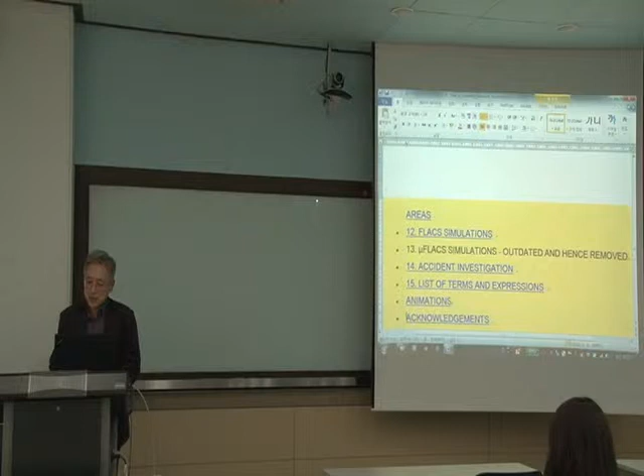Don't be disappointed for chapter 8, because it covers whole structural dynamics in a few pages.

What happened to Hyunchul? Who else is missing here? Kyung-suk is here. Is Hyunchul the only one? Oh, Bong-sik too. What happened? They didn't tell me.

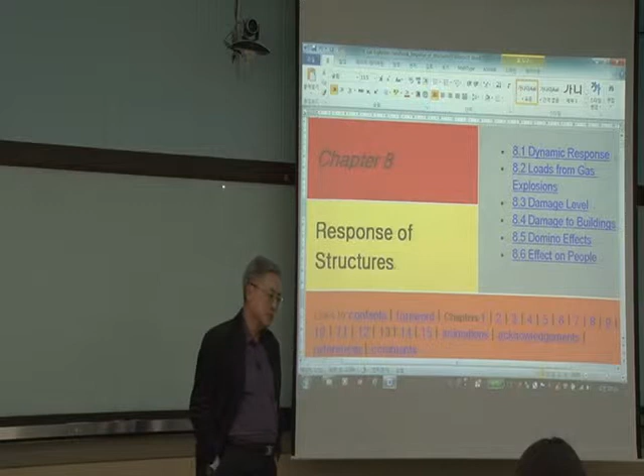Okay, response of structure. As I surveyed Monday, most of you took the course on vibration. Vibration is not identical to structural dynamics. The art of vibration is a subset of structural dynamics.

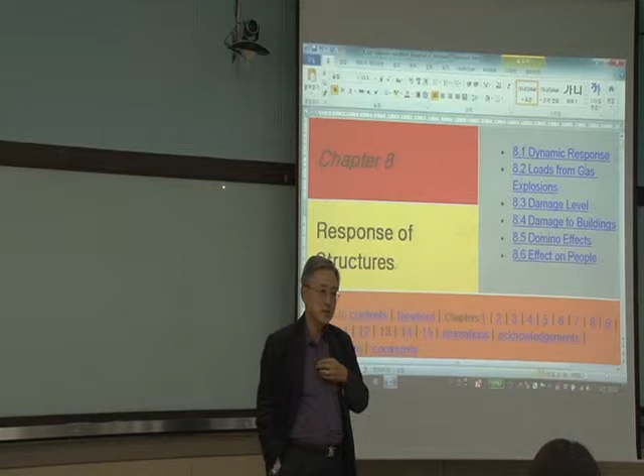But one time or another, even OSE has a variety of students majoring even in electrical engineering, chemical engineering, mechanical, aeronautical, all that. But when I teach at the Naval Postgraduate School, we have a psychology major undergraduate, education major undergraduate, pursuing the master's in mechanical engineering.

What do you think? It's very difficult. They have a tough time, but back then we had a program for 2.5 years. In that time they did very successfully, but they are taking four straight courses throughout the year, and in addition they have to write a thesis. So day and night they pursued it. It was very successful. I never saw anybody who failed.

One person, one officer who failed under my supervision couldn't get the minimum 3.0. He got 2.98. If you round off, it's a 3.0, that's good enough. But in the military, 2.98, you can't graduate. So out of over 110 students under my direction, he couldn't get the degree. That's what happened. That's their rule. That was a pretty sad moment.

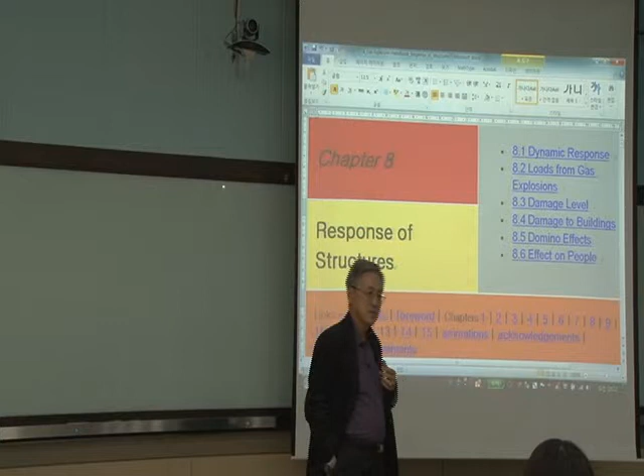But here we have a variety of students. If you didn't take the vibration class or structural dynamics class, I think you have to rethink taking that course, because without dynamics, just getting statics is not enough. Dynamics—you have to learn the basics to have a successful career.

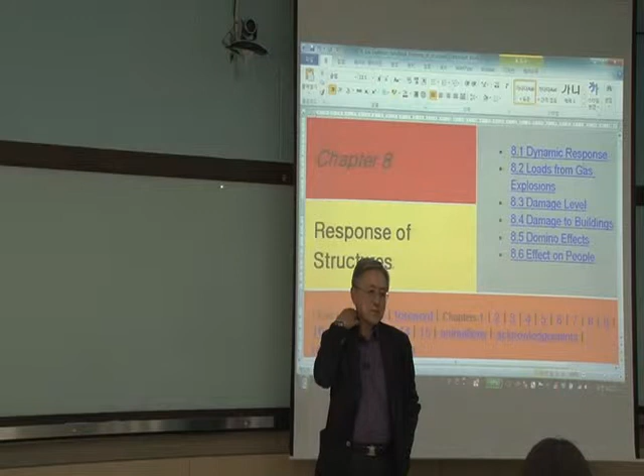So this is the response of structure. Section 1, dynamic response. So dynamic response and static response, what's the difference? All the ship designers, they use a skill called statics. In the past and the present, I really don't know the detail in Korea's shipbuilding business.

In the US, everything was based on static analysis. No dynamic analysis for designing the hull thickness—all the internal structure design, they use statics. And they use the so-called safety factor. Safety factor is really a static concept—it's part of the static analysis, which is a multiplier.

So the safety factor, the naval architect applies it to strengths. They divide the strengths, like yield strength or yield stress or ultimate stress, by the safety factor to reduce the strength or stress, which is not very good practice.

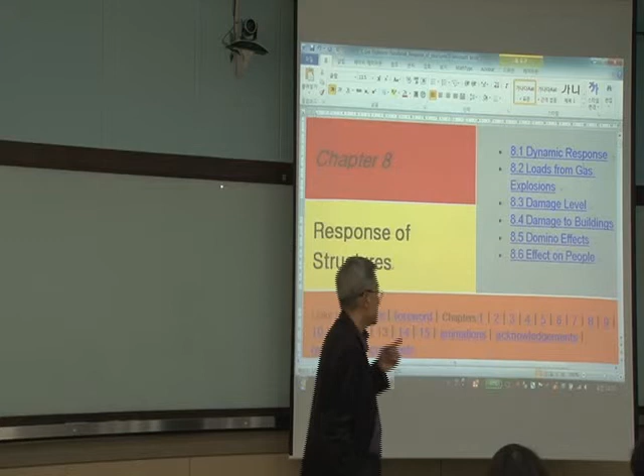It's introducing a very simple concept on structure dynamics, but you must know, and most of you know, I'm pretty sure 100%, what vibration is, what structure dynamics is. Before you graduate, I want to tell you to take at least one course. That's very important. So, dynamic response.

And section 2, load from gas explosion. Don't be disappointed as you read this section, not much there, because it depends on the type of fuel, everything changes. And configuration changes everything. It's not a simple gas explosion in the open environment.

Sometimes it's partially closed, fully closed. It happened in the tube, or vice versa. And the damage level, we'll talk a little bit about that.

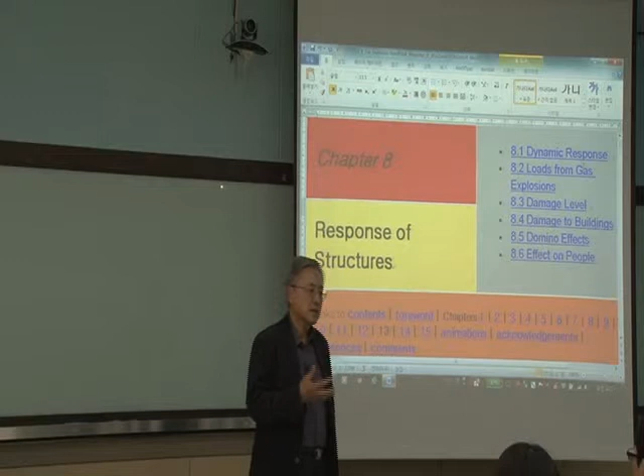Damage to the building and domino effect, which is really, I can say, close to progressive collapse. In the building, for example, if a deck collapses due to the explosion, then progressively, as a result of the collapsing deck, the next moment the wall could be collapsing. Then as a third part, the whole thing could collapse.

And if one critical structure member collapses, as a result, another part can be collapsed. As a result, other parts will be collapsed. It's called a domino effect, okay?

Progressive collapse. This is another, not really mechanical, general structure mechanics and simple mechanics. There is an art called progressive collapse.

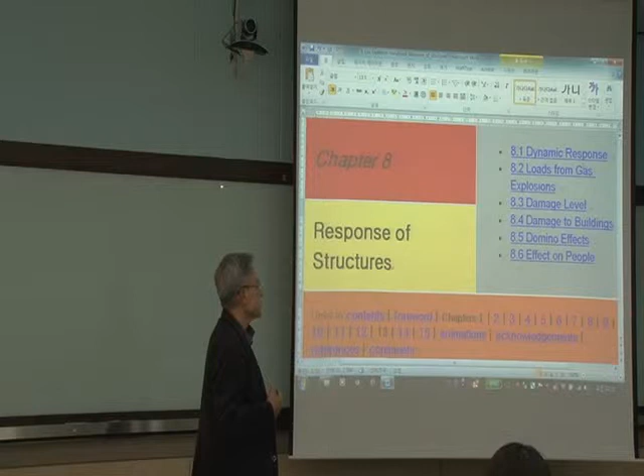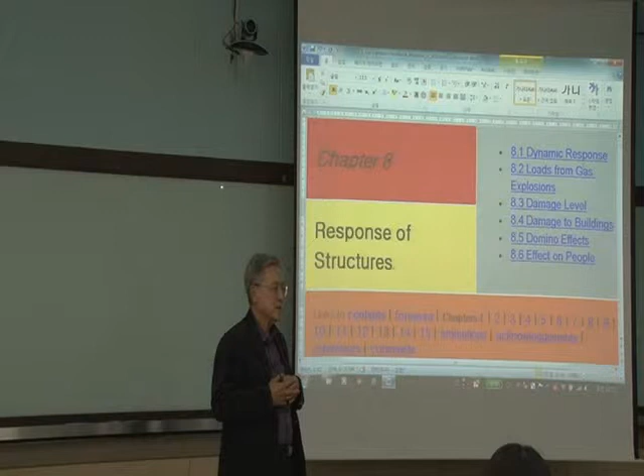Domino effect, people, and the effect on the people. For gas explosion, it gives a direct impact to the people. But you see the accident situation, the most recent accident is the Busan accident.

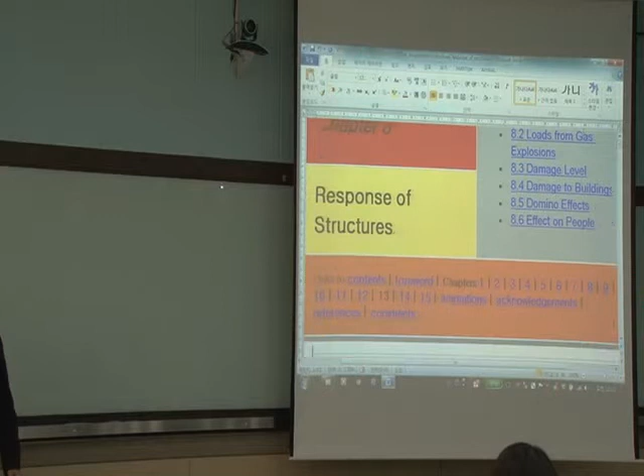Few people really died as a result of the accident, and there are a few different things you can remember, but this chapter tells some story, not much story. So to predict explosion pressure is one step in the consequence analysis.

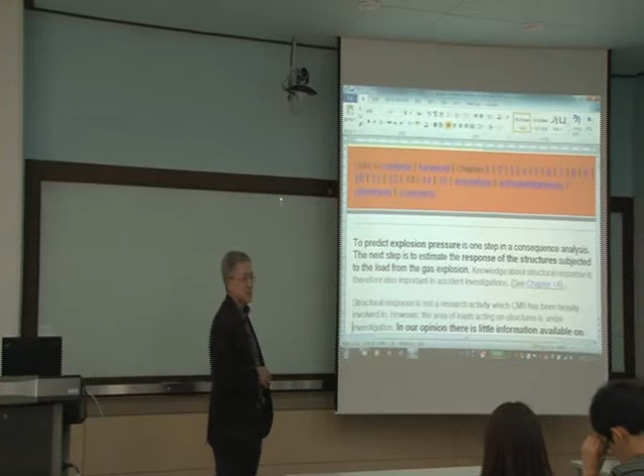The next step is to estimate the response of the structures subjected to the load from the gas explosion. It's very easy to say, but there is difficulty to define the loading.

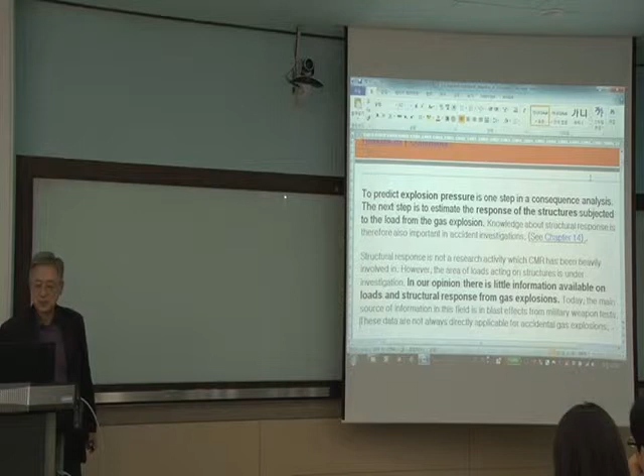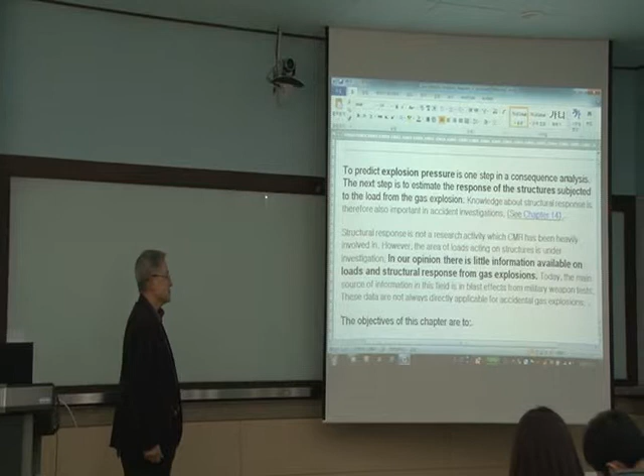So here, in our opinion, there is little information available on load and structure response as a result of gas explosion. But don't feel like, geez, what could I do. Since 1985, there are lots of publications available for all different types of fuel.

Then you can really explore the internet. You will get lots of information for the particular environment, for the particular loading. So it's not really disastrous.

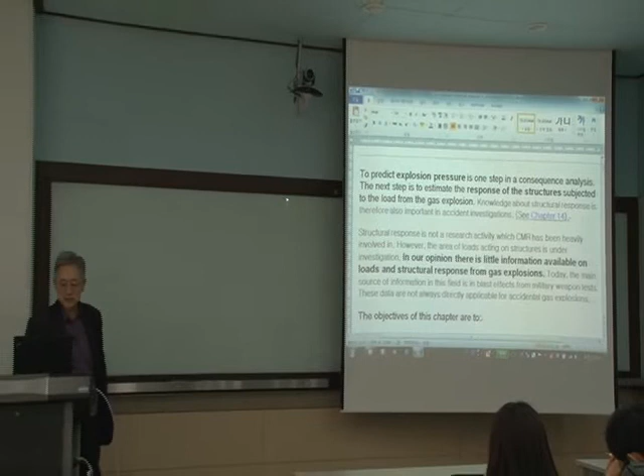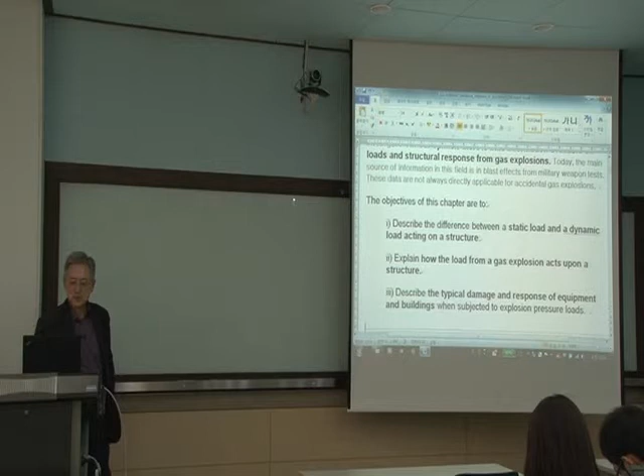Objective in this chapter is to describe the difference between static load and dynamic load acting on a structure, two basics. Explain how the load from the gas explosion acts upon a structure. Describe the typical damage and response of equipment and buildings when subjected to explosion pressure loading.

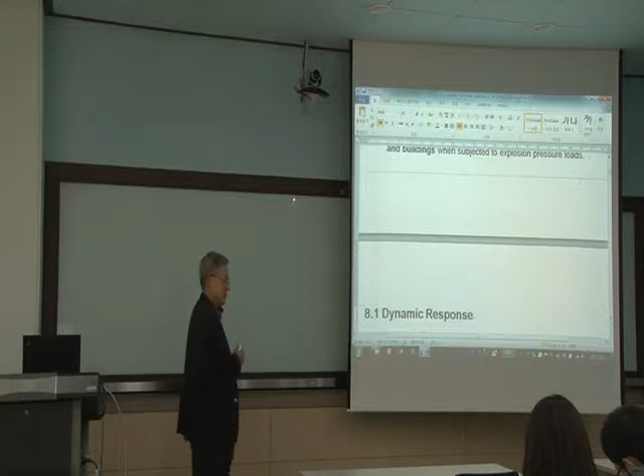Explosion pressure loading. For gas explosion, you are considering the flame effect also, the fire effect, temperature effect that you have to also consider. And section 8.1, dynamic response, is concerned.

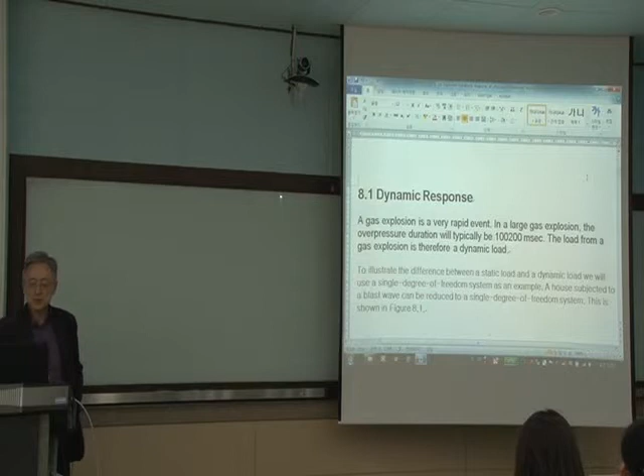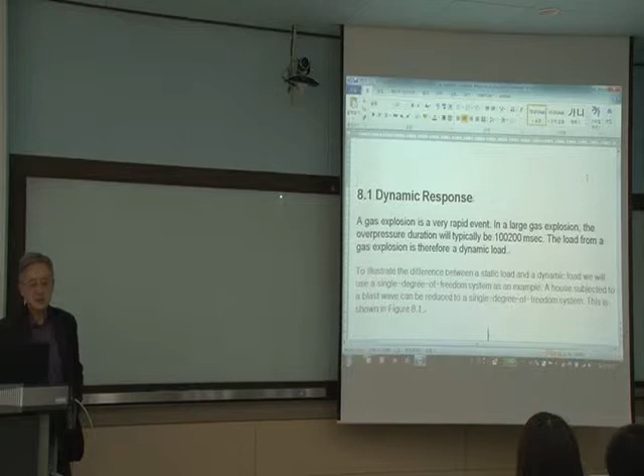The gas explosion is a very rapid event. In a large gas explosion, the overpressure duration typically is something like almost 2 minutes. Could be longer, depending if it combines with a fire. The duration could be longer than 2 minutes.

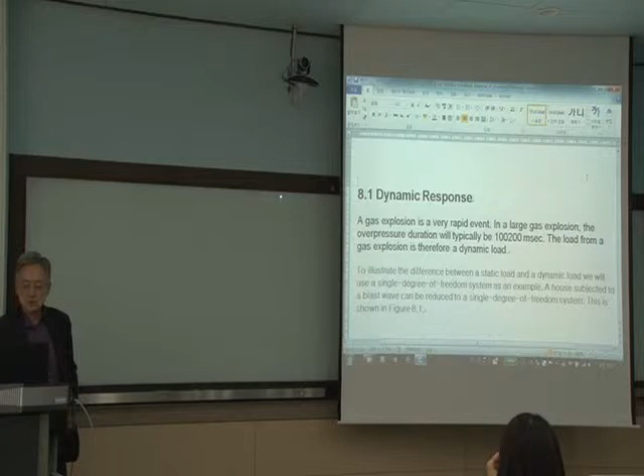So this is in milliseconds. You divide by 1,000, then you get the second. Then you divide again by 60, then you get the minutes, about almost 2 minutes. But duration really varies. Duration of the loading for gas explosion, don't think it's only milliseconds.

Chemical explosion, high explosive, is less than 3 or 4 milliseconds. Everything is all done, loading is done. But for gas explosion, no.

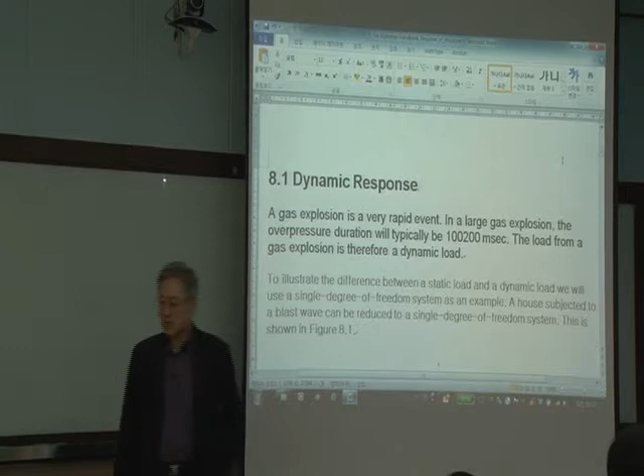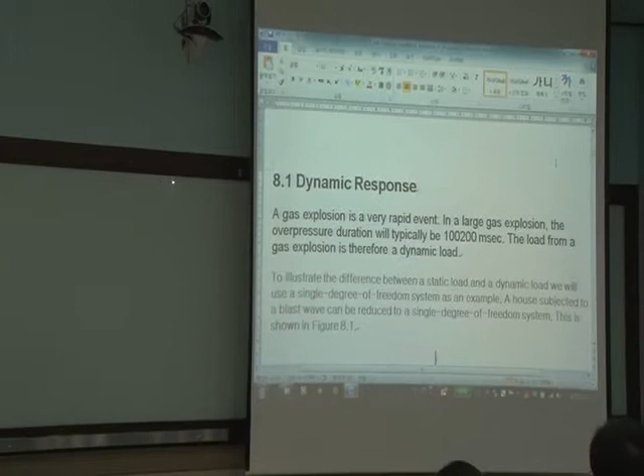If it's coupled with the flame, fire, it could go more than 2 minutes, could last 10 minutes. So that's what you have to think about. Gas explosion, this 2 minutes maybe for gas explosion. For explosion, maybe okay.

I was going to draw all that, but it's too basic. I'm not going to bother to do that. Just to capture the concept here again.

But whoever faces this for the first time, this is about the simplest you can think of. This is like a gable frame, the house or buildings, whatever. Then you can convert it into the simple mass spring model.

So mass and spring. Here, no damping is included because damping dissipates the energy. So if you put damping in the model, then the response slowly reduces in an exponential fashion. So this prototype converts into the model as a pressure here, shock pressure, and this is the mass of the building.

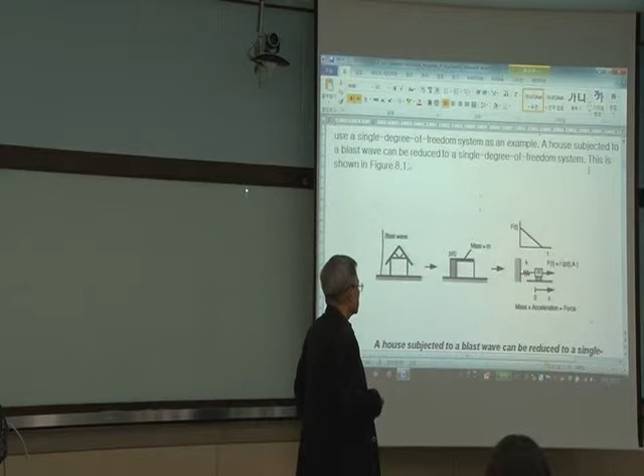So building times, what's this? Building mass is simply saying mass is m. This is pressure, which is loading. And this column you can replace as a spring. So mass spring model, and this P is pressure times exposed area, which is a force.

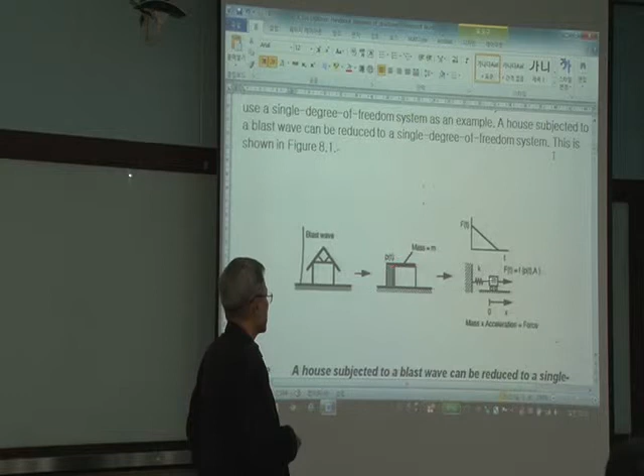It's a time domain force, so that's dynamic loading. Then if you write equations of motion for this simple model, this is like a fixed model. You could make it more complicated. If the base oscillates, like earthquake loading, sea wave loading, that's a time-dependent displacement you have to introduce.

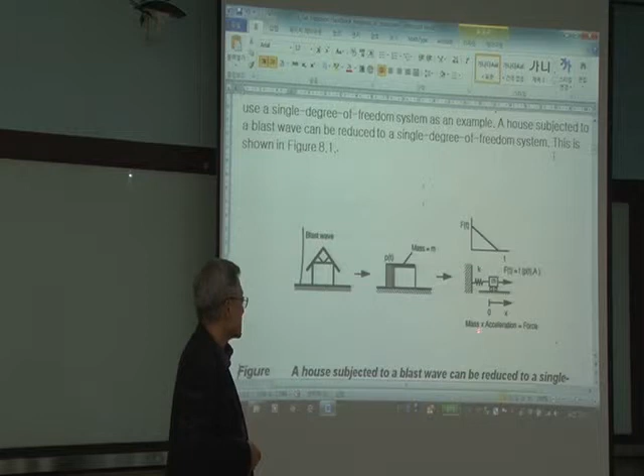So if you write the equations of motion for this model, what is it? Who took the vibration course? The basic equation is M x double dot plus K x equals F, right? F here is this triangular pulse, you can say shock loading. So M x double dot plus K x equals F, which is a time-varying loading, and that's what you have to solve.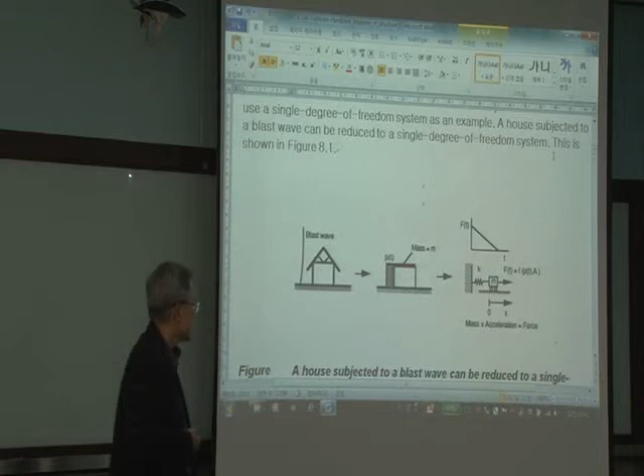If you consider the damper, which is a dashpot damper, then you usually use C. C's unit involves the velocity term, right? So C x dot is the damping force, which dissipates the energy. Here there is no damping in the system.

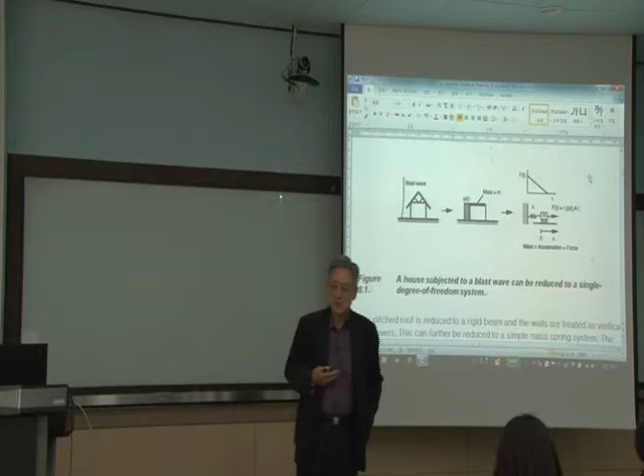So it reduces down to the single degree of freedom system. Usually you can handle all the multiple degrees of freedom, and you can use a finite element model or finite difference model, depending on the system you are dealing with, whether it's a fluid system, a structure system, or a combined system. You can introduce those models. In structure systems, as you know, the finite element method is most popular.

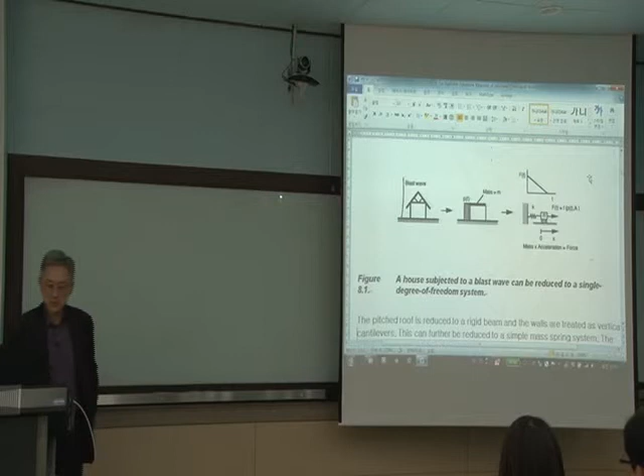And this is a result of the single degree of freedom system. Over here, this is displacement, which is x, the dynamic response divided by the static response. So this is like the static response, and this is the dynamic response with a different TL, okay.

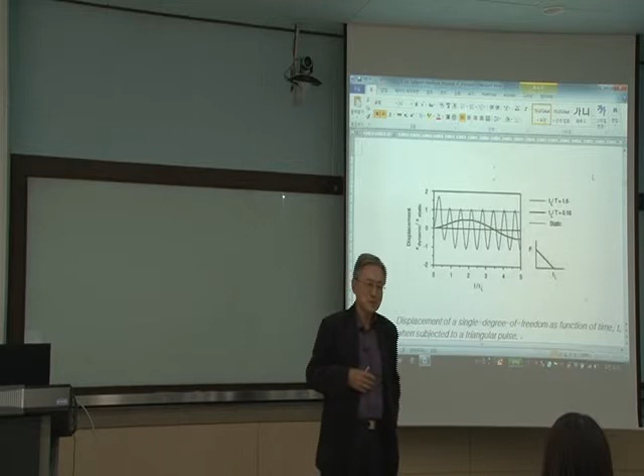Dealing with the ratio here, T is the duration, which is the fundamental period. T equals 1 over F, right? For a single degree of freedom system, you have only one period, which you can call T. T is 1 over F, 1 over the fundamental frequency, and 2 pi F equals omega.

This is all the first lecture of vibrations. Don't look at me like that. Which is all that stuff.

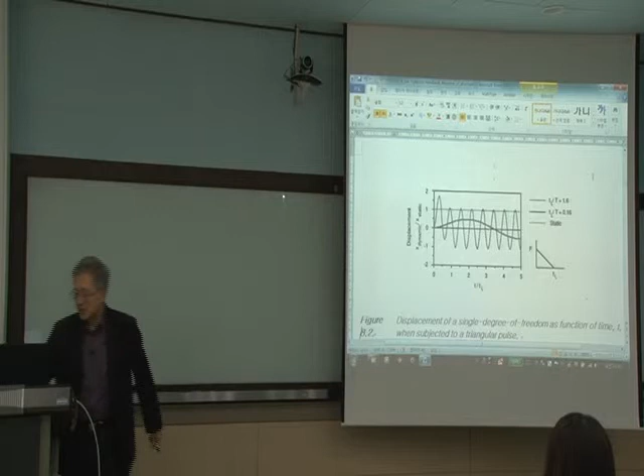So then it shows this is really fundamental. The period is very long here, and this fundamental period is a little bit higher. You can compute all that, but it's virtually solving the equations of motion for the single degree of freedom model. So this is the case.

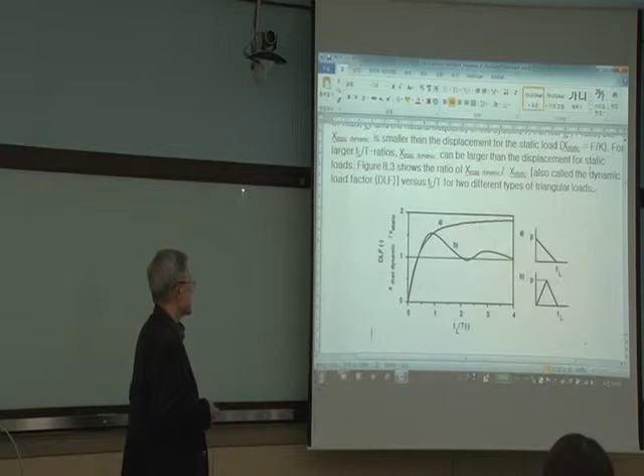DLF here, they use a slightly different naming. This is the DLF, as shown here, dynamic load factor or dynamic amplification factor. They use different names, but for dynamics the response amplifies, that's what it really shows here. For a triangular pulse of this type, this is A, the response goes like this. This is TL over T, the fundamental period.

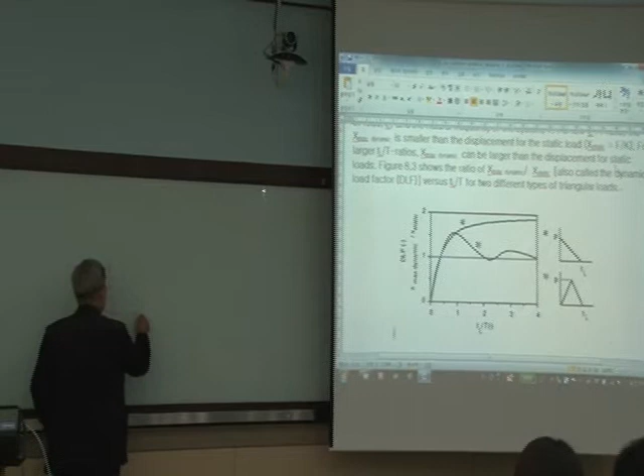So I don't want to skip even this: T, the basic equation for vibration frequency, right? Period, right? And 2 pi f equals omega, radians per second. This is all the beginning of vibrations. So here you can say f equals omega over 2 pi. So you can do whatever.

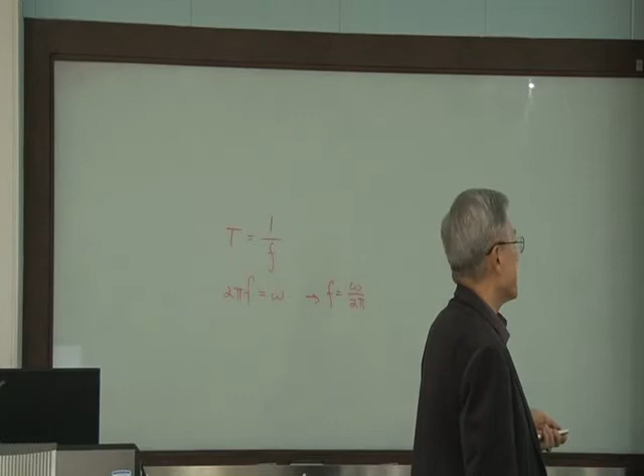So for different pulses, then you can see this. You can compute all this very easily.

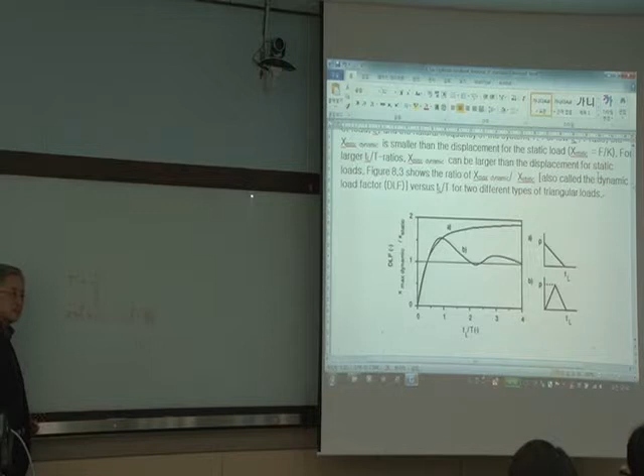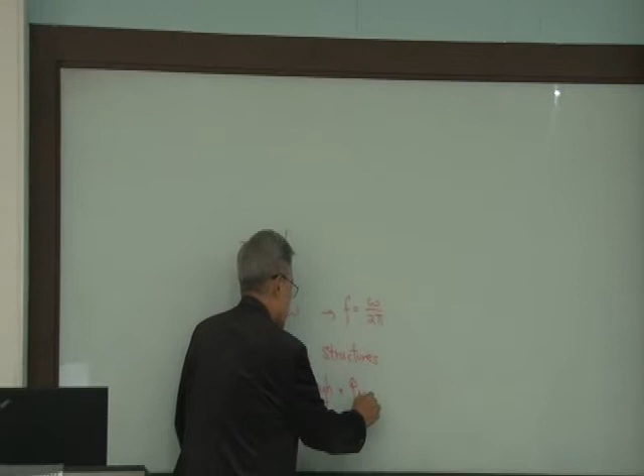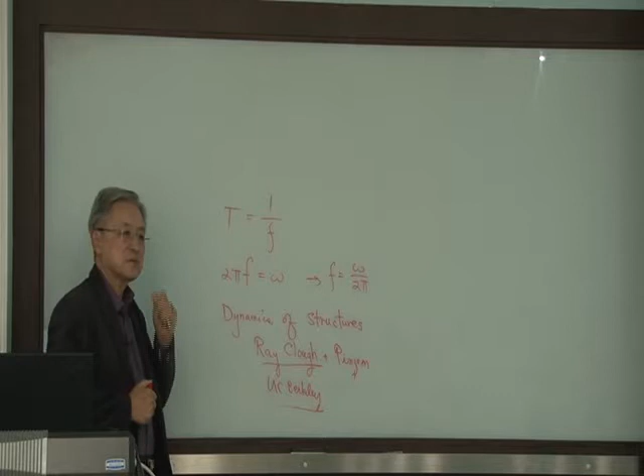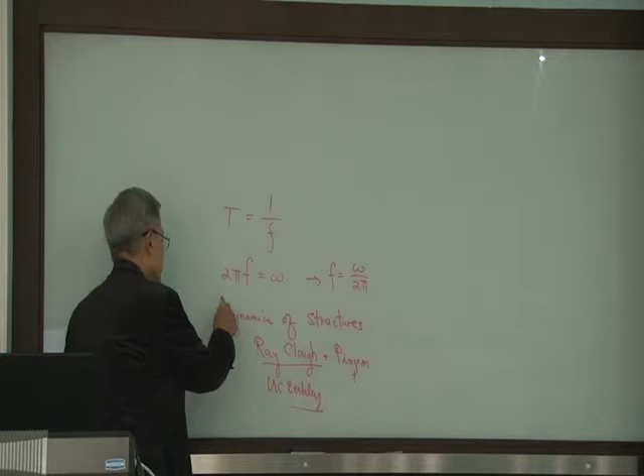One book I suggest, if anybody has interest to study continuously on dynamic response, is Dynamics of Structures, written by Ray Clough, UC Berkeley professor. I think he's now retired, and there's a second author, I don't remember the exact name. The book keeps being revised, and I happen to have the most recent edition. It's a very, very good book, very easy to read, one of the best books. There are a couple more, but this is a very thick book.

So if you want to study, this is the one you may consider. All the derivations of the necessary equations for all this kind of pulse loading, you can look at it there.

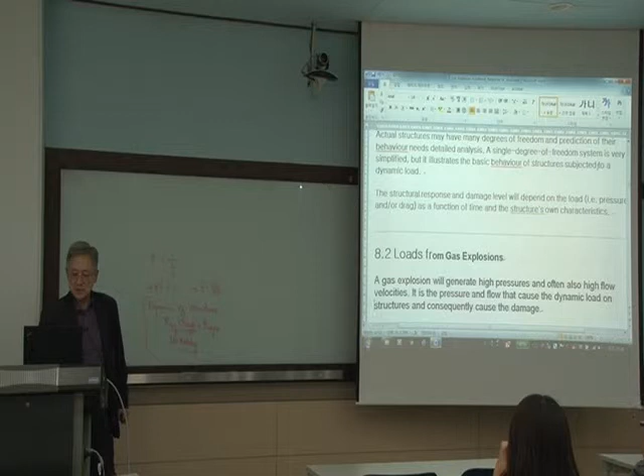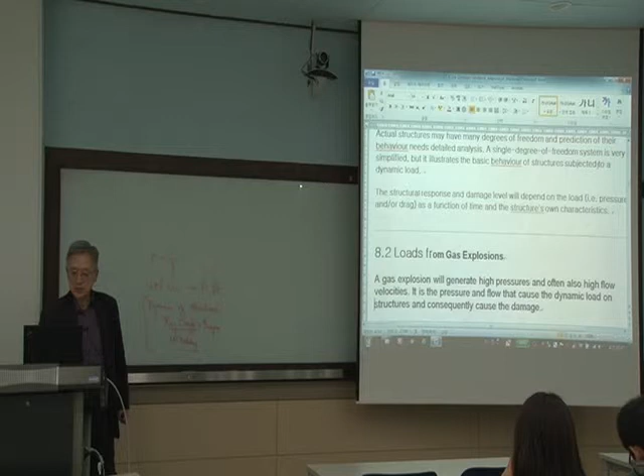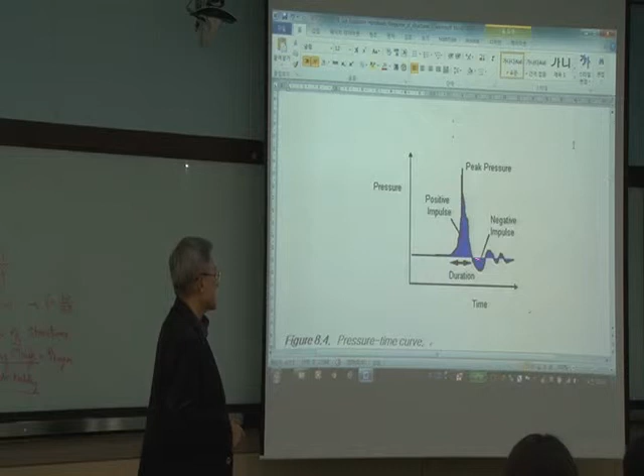And the typical loading pattern, pressure as a result of the gas explosion. So here, this is the duration. Gas explosion duration really varies; for chemical explosion, duration is almost fixed. Peak pressure, positive impulse is the area under the loading, and positive is compressing the system structures, while negative impulse is pulling back. So it has such a combination for the pressure loading. Okay, typical pressure loading.

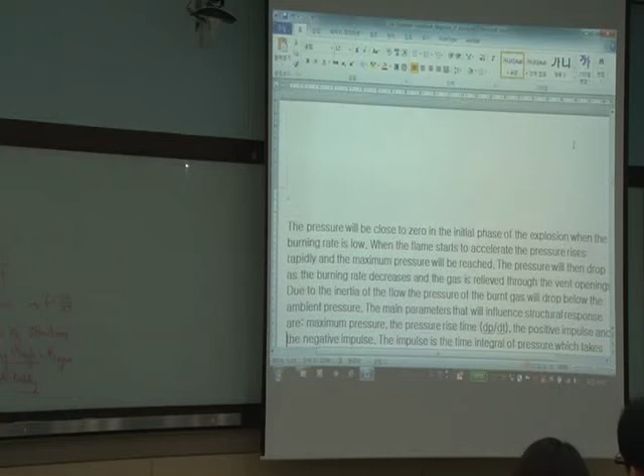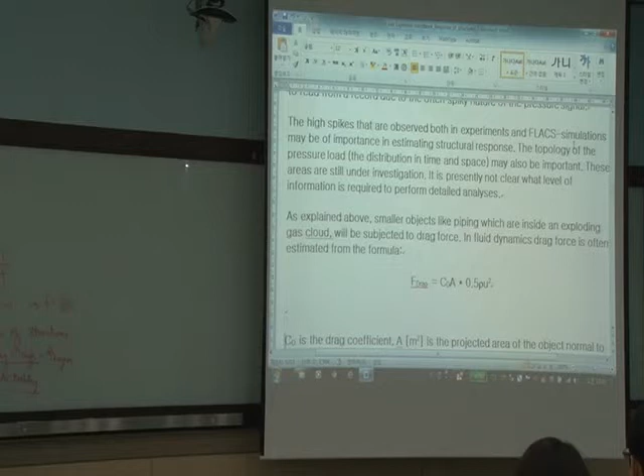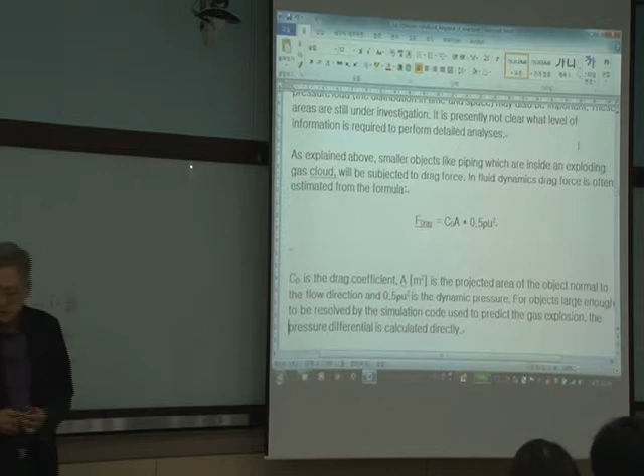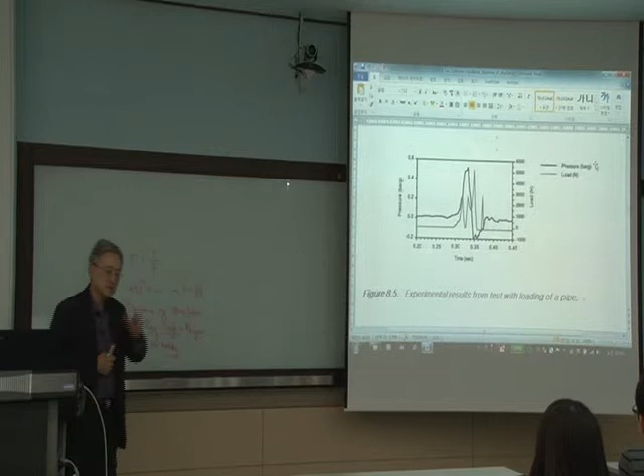And this is the drag loading part. CD here is the drag coefficient, right? And A is exposed area. This is half times rho, the mass density, u squared, u is the velocity component, okay? So that's what the typical drag force is. But the equation is nothing but just based on the basic principle, the question is how to predict it. I don't know whether FLACS can compute all this or not.

That's we'll discuss with Professor Han next Monday. Hopefully Monday or Wednesday.

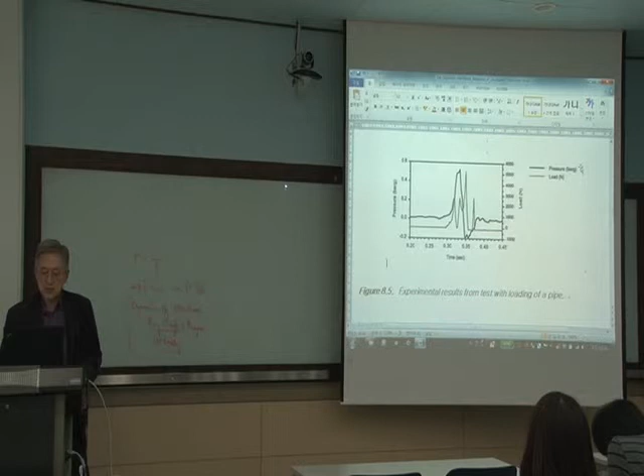So this is for some situations here for the pipe loading situation, you can take a look at. And this is, I briefly mentioned the other day about this.

Reflection of the shock wave when it hits the wall head on. So of course this is a shock wave as a result of gas explosion. U is the flow velocity, much higher than zero, of course, in shock situation. But in front is zero, everything is calm, that's what the explosion situation is. As it hits, in front of the wall, which is rigid, you can assume U is equal to zero. Then reflection wave is coming out. Depending on the absorption in the wall, the reflection velocity is of course changing, could be less than U, the incident wave velocity. If it's rigid, it comes back with the same U as the incident, otherwise less than that. But again, the pressure experienced by the wall gonna be maximum twice of the incident shock pressure, as we talked.

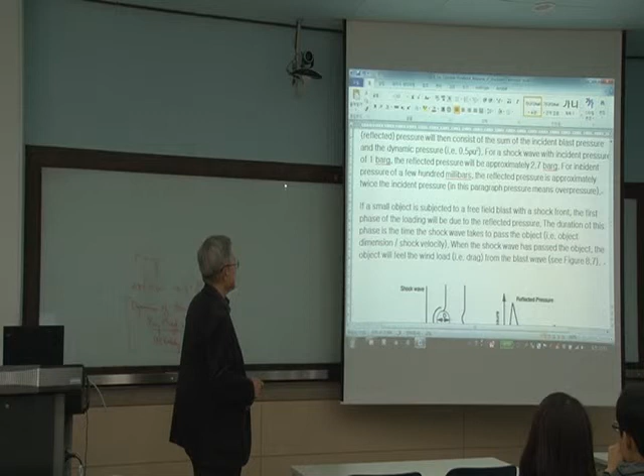Now let's move on here, and as you look, you're talking about incident pressure of a few hundred millibar, 1/1000th of 1 bar, and 1 bar is around 14.7 psi.

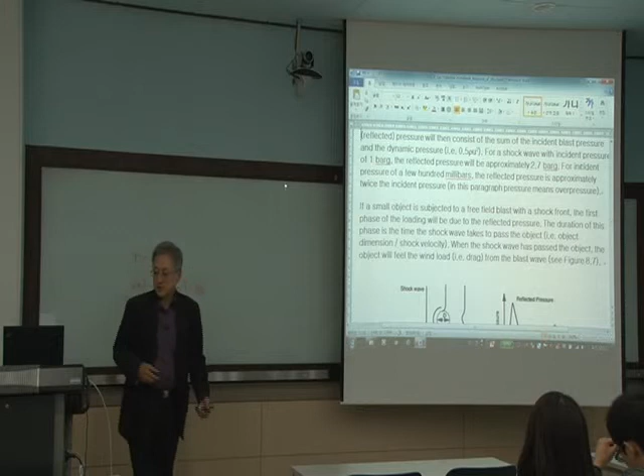And as you look at the loading situation, as you see here, it's time versus pressure. It's always for air explosion or gas explosion, which has two triangular parts. One good report is a technical manual developed by the U.S. Army for the type of pressure loading. This is mostly for air explosion situation, which is close to gas explosion. One part is the reflection as a result of the reflection wave. This is due to the drag loading, drag pressure, which is really part of the incident shock wave pressure. Incident and reflection. So it's always like this, duration for chemical explosion in air is very short, but for gas explosion, maybe not. Reflection wave comes here, then others just keep dragging. Incident shock wave - initial shock wave pressure before hitting the structure. So it's worth keeping that in mind, the basic loading pattern.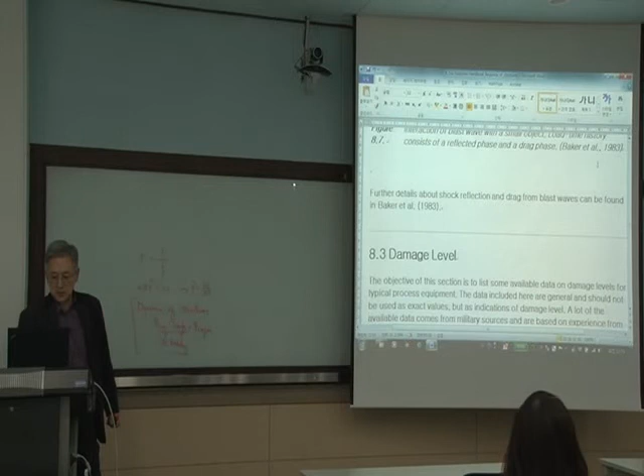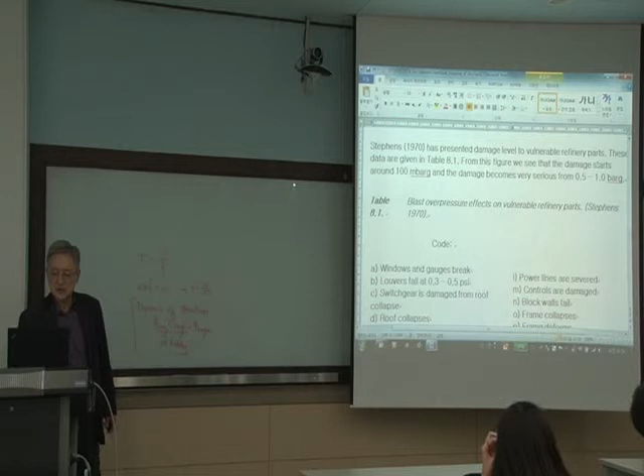Okay, couple more minutes then. Damage level, you can really read this - there's a blast overpressure effect on a vulnerable refinery part. All this part, you are dealing with PSI, fraction of the PSI, which means, think of 14.7 as 1 bar, it's a fraction of the PSI.

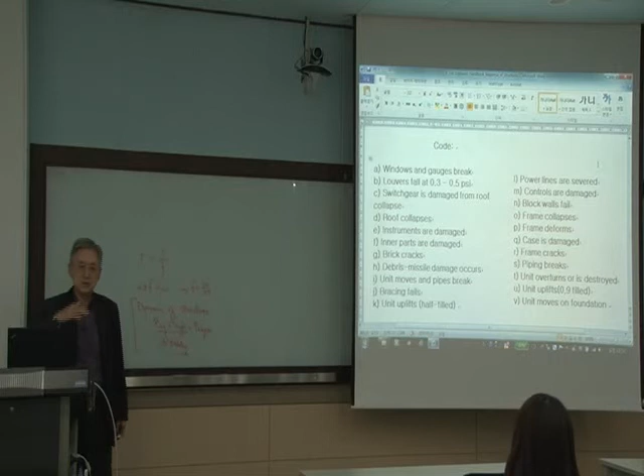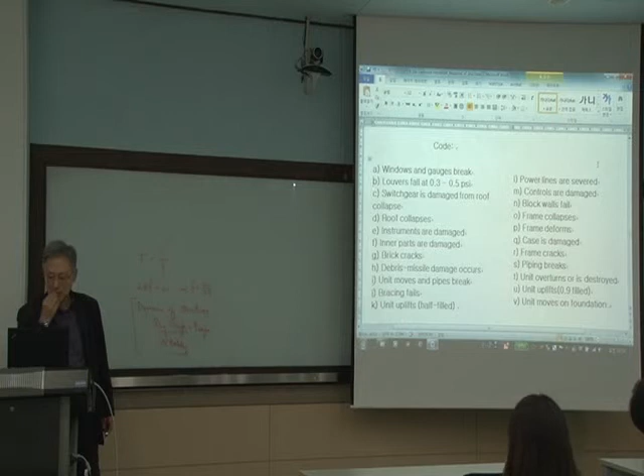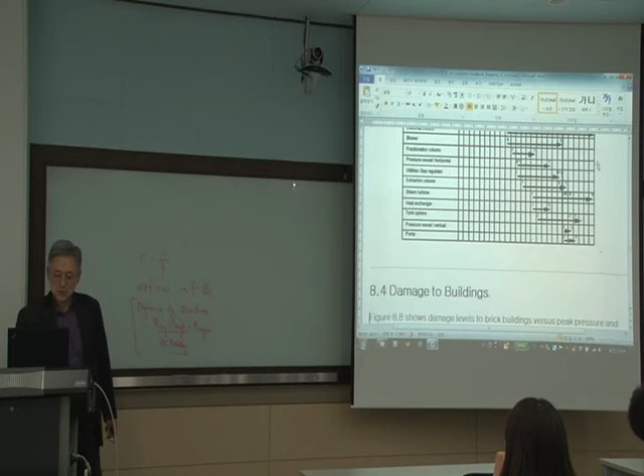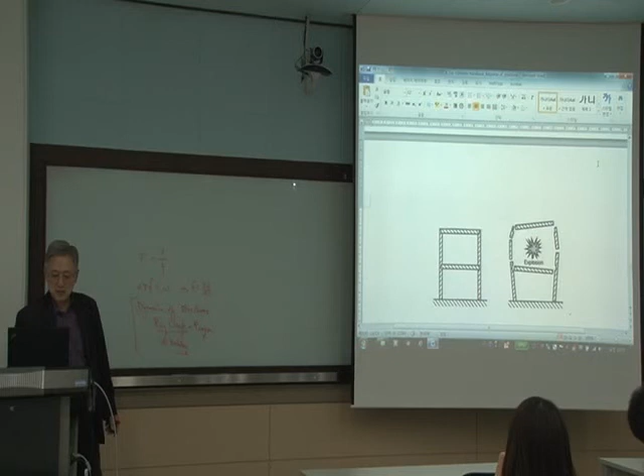Window could collapse. The louvers are ventilation openings, right? So that sort of thing, piping breaks, roof collapses - that's sort of the items you can think of for plant damage, okay? And this translates into the chart. The damage of the building for internal explosions, progressive collapse could be like this. We were involved in the naval vessel internal explosion - this is exactly what such a situation is.

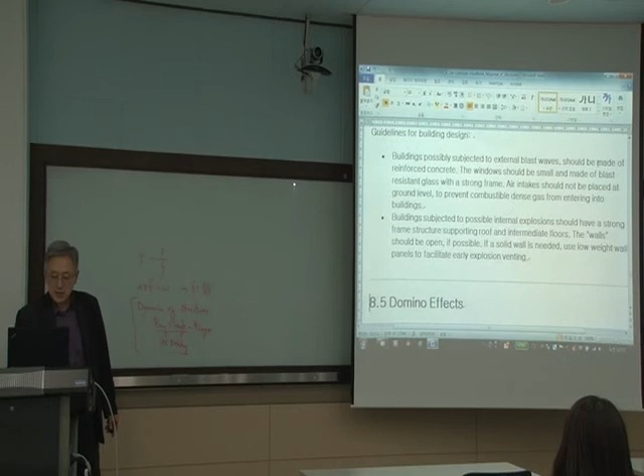Okay, and the guidelines you can read. The dominoes is talking about the domino effect, you know, which is part of the progressive collapse. Not much information, but talking.

And people, effect on the people - here the description is very simple. It said it's burnings, the fragments hitting the people, and building or other structures falling down. So there is no unknown kind of injury to the people, but this is what another bad thing is, the last one - fragment is the most problem in the defense area.

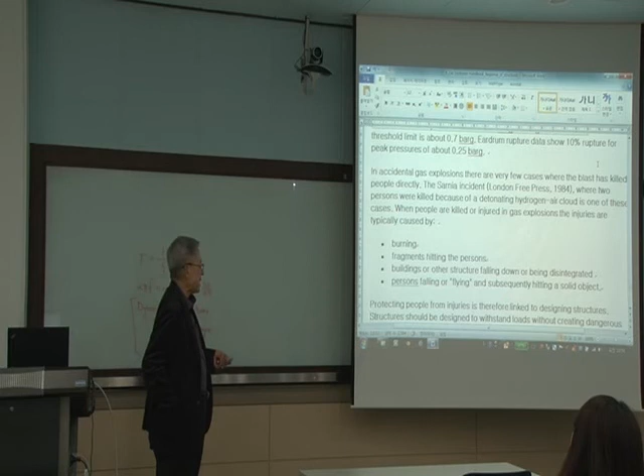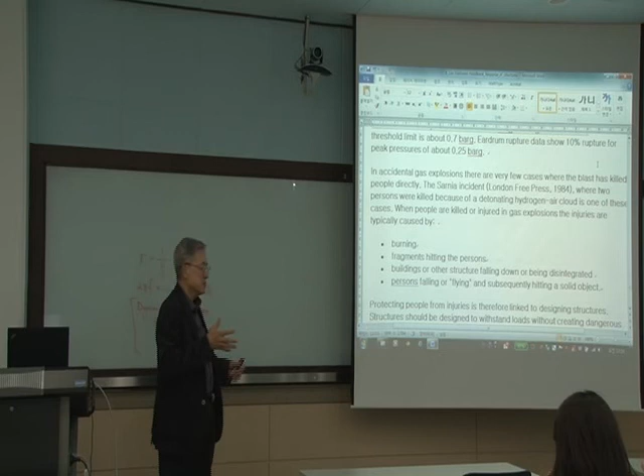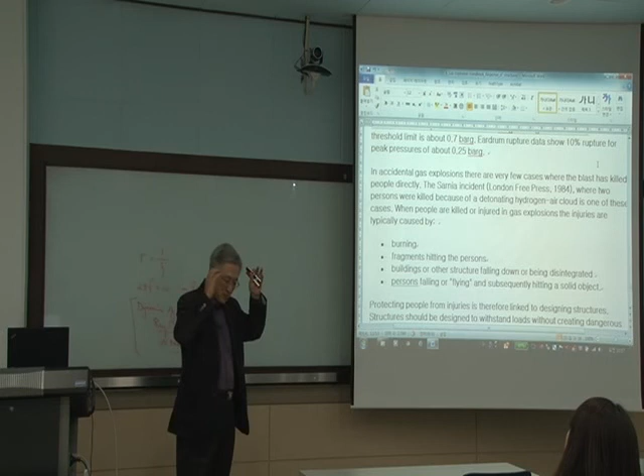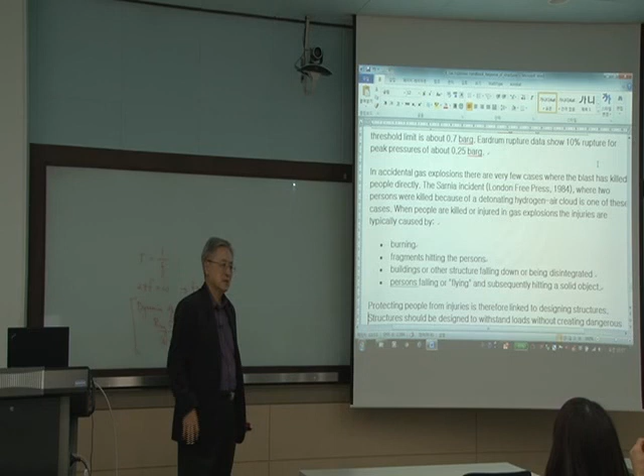This is a kind of accidental situation, but in the defense area, the fragmentation is artificially generated at the time of explosion, because at the time of explosion, not only shock is a problem, the shell really breaks into pieces and flies all over the place. So it tries to kill the target as many as possible. That's a big problem nowadays. In the Second World War, when they dropped a bomb, it destroyed one particular area, no more. As you drop the bomb, then around mid-air, the explosion occurs, then fragmentation occurs, it spreads all over the place. So it kills many targets all at the same time.